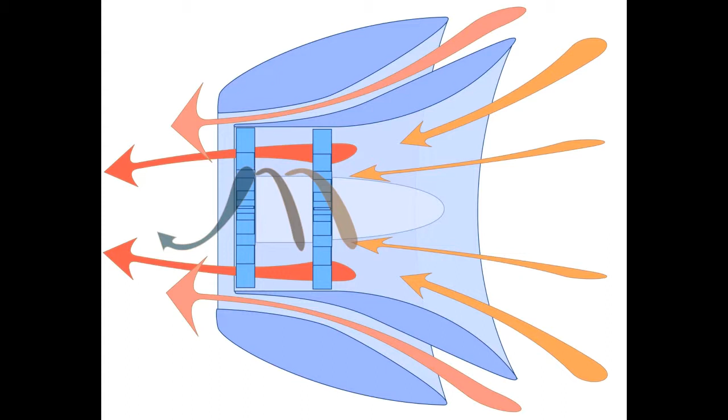Strait Power consists of two converging nozzles. Water enters the first nozzle by direction of the orange arrows. It's accelerated past two turbine blades. Upon exiting, the water receives an energy boost, causing the water to flow more rapidly through the center nozzle.

With an idea in mind, I approached DTE to find out how much energy was used and how much Strait Power had to produce. Contacting Great Lakes Observing Systems for information about current river speeds, I plotted a map of viable locations that Strait Power could function in.

On June 30th, 2010, University of Michigan's Hydrolab described an open water blade system in development. They agreed to combine our projects and test Strait Power.

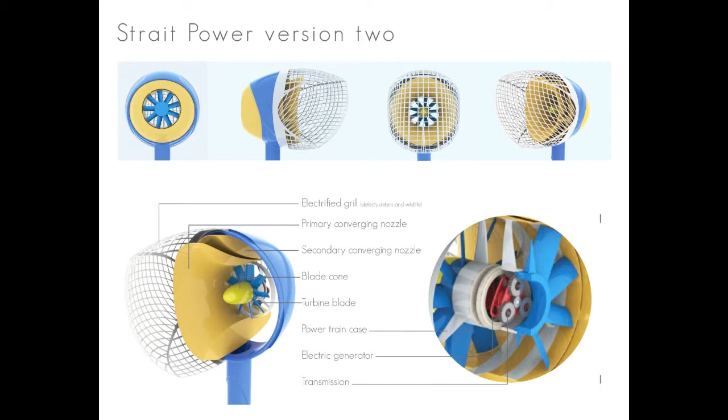Drawing inspiration from the shark, version 1 was a tribute to the gaping giant's mouth. With visualization of inspiration, I quickly moved on to version 2.

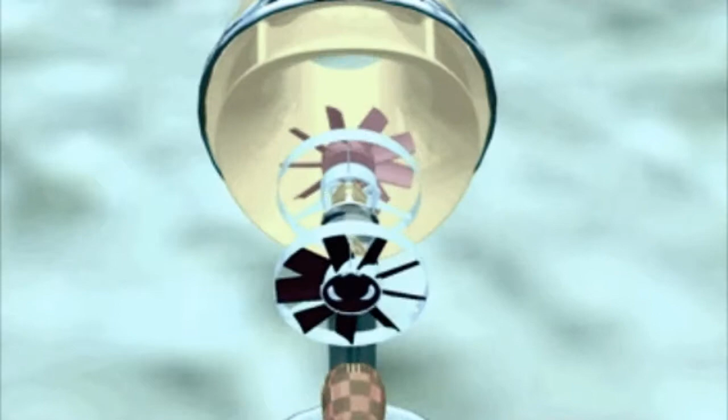With visions of water rushing through the turbine, I thought Strait Power should consist of an electrified grill for deflecting debris and diverting wildlife, a blade cone to help in accelerating the water past two turbine blades, with a planetary gear transmission and electric generator.

Water rushes into the turbine, rotating the first turbine, then reverses direction when it hits the second.

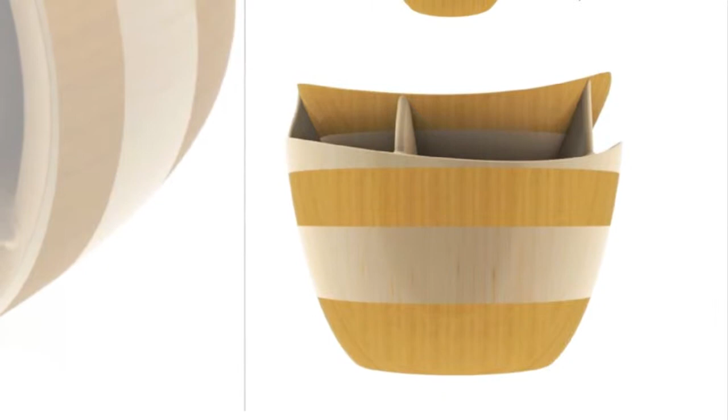With the concept conceived, I approached University of Michigan with my idea for testing. With my idea approved, it was time to build a prototype. The prototype started with $0 and nowhere to build it.

CCS was going through renovations. On August 1st, I had to find a workshop and funding. Testing was going to start at the end of October. I first found 3 trees to build Strait Power. Started working with a local lumber mill to turn the trees into lumber. But the mill informed me that the wood would not be ready until October.

Then I traded my lumber for the use of some tools, which led me to Dennis Burke, a man who gave me a place to build Strait Power. So I put 1,000 feet of lumber on my credit card and began to build.

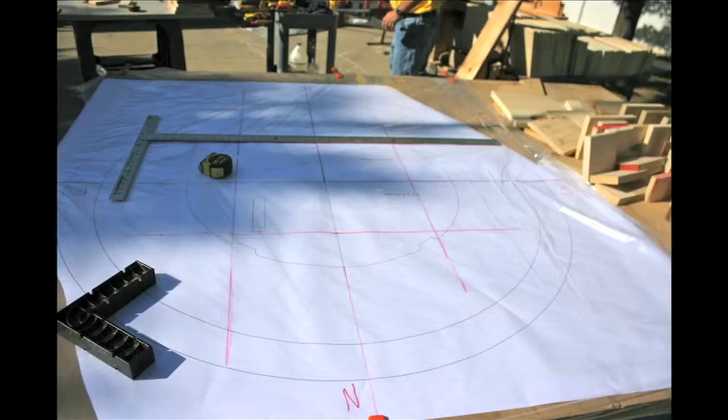It all started at Dennis Burke's woodshop, a place where 4,800 cuts would be made in 26 days. 8 rings were assembled, glued with every scrap of wood there was. Total, 390 hours before we made it to the CCS woodshop.

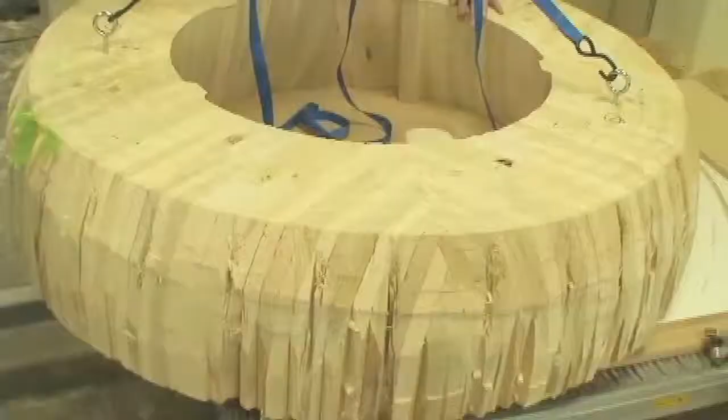Here is where we chainsawed, glued, doweled, and hammered the rings into workable, manageable shapes for the mill. Once the parts came off the mill, they were then sanded, finalized, shaped, trimmed, put into the perfect condition for assembly.

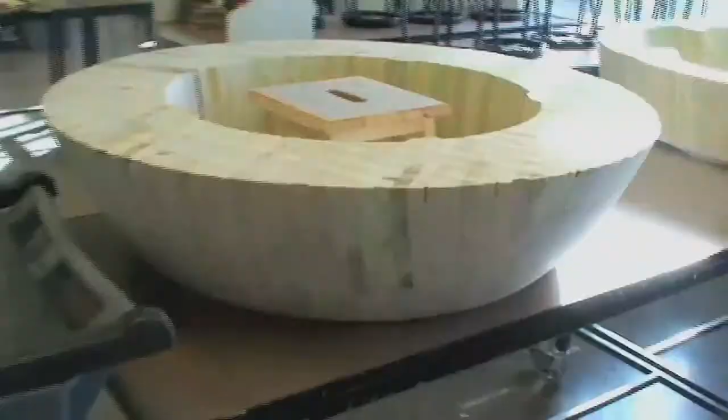All the joints had lined up, all the boards were in place, surfaces were flat. It was time to build the transmission.

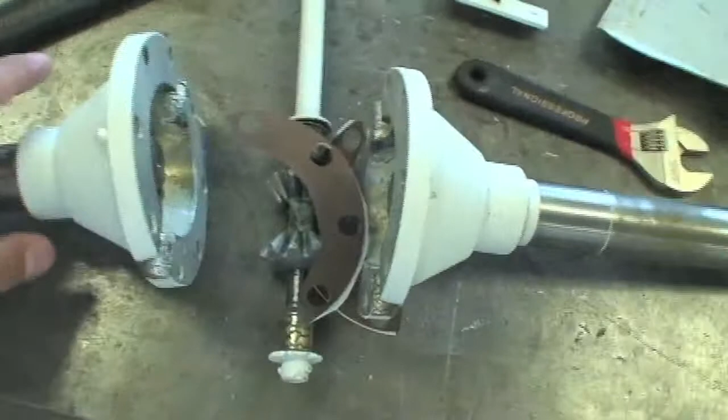Transmission consisted of a custom gasket, some pinion gears, housed in an aluminum housing from a go-kart differential. These parts had to be remachined, milled, and put on the lathe so that they would work in the fashion that I wanted. Assembling them together, the transmission came to fruition.

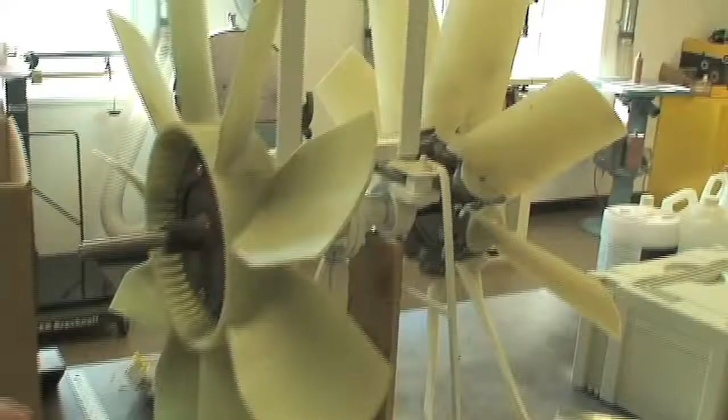Assembly continued on the nozzle. Simple tasks like sanding the inside required the use of a jib crane donated by the school to get in and out of the model. Sanding every surface, I added another 3 gallons of body filler to smooth out all the contours.

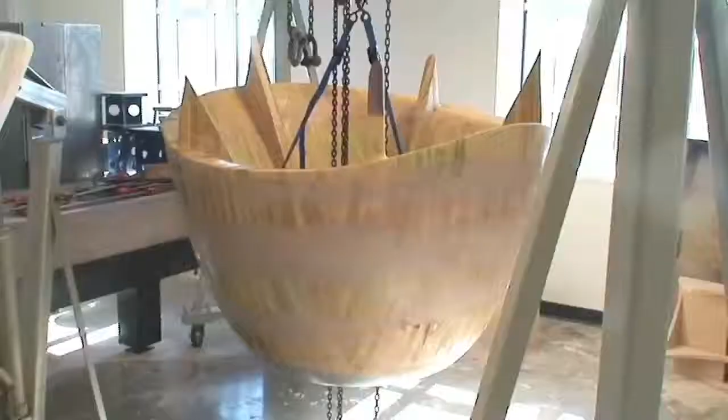The seams were lining up, all the math I'd done was correct. The 4,800 boards really came together into one fluid, dynamic shape. All that was left was to finish sealing it with marine paint

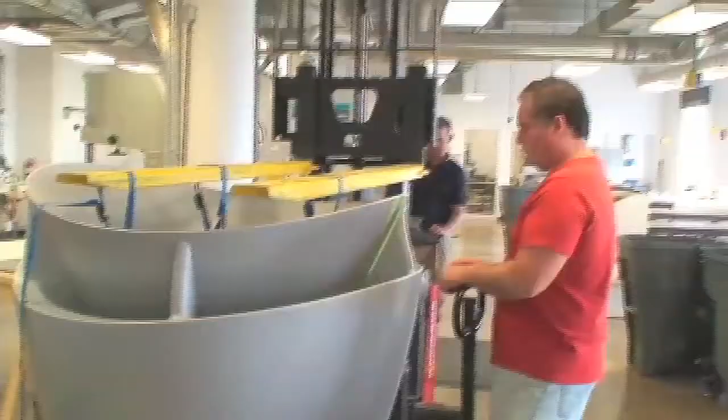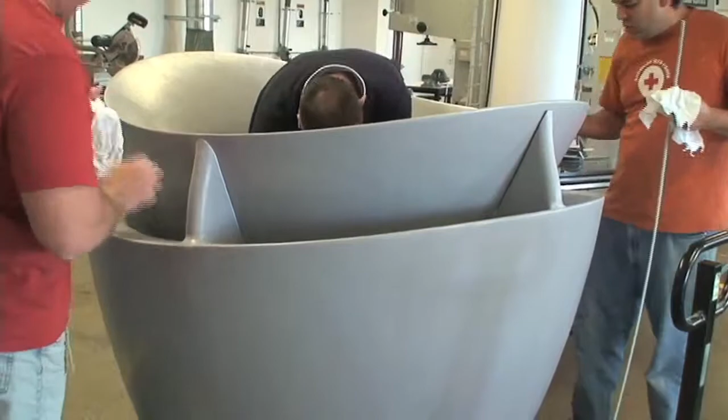and assembly with a forklift. Adding a little bit of sealer to seal up all the holes, placing it down ever so carefully, and screwing it together. Strait Power was packed and ready to head off to U of M.

32 days of prepping and cutting. Another 256 hours went into Strait Power. On October 23, 2010, a truck from U of M's Hydro Lab came to pick up Strait Power.

It was 711 hours of work. Strapping it down with tender loving care, hoping and praying that it would make the journey, I placed the transmission in the back of the truck, ready for its long trip, as I awaited its final assembly at U of M's laboratories.

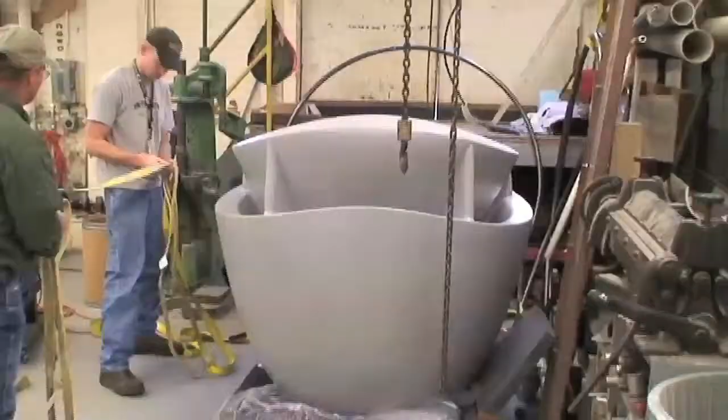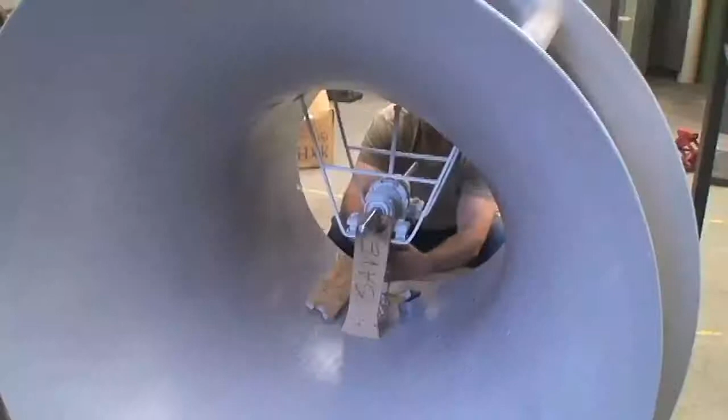When it arrived at U of M, we had the task of placing it inside its mount. We had to build a custom aligning bench, assemble the transmission, weld the final drive shaft, and imagine the water flowing through it.

Now time to tame the beast. University of Michigan's Hydrodynamic Lab, home of the largest educational tow tank in the U.S. This is a place where they test military subs, America's Cup boats, and Discovery Channel shows.

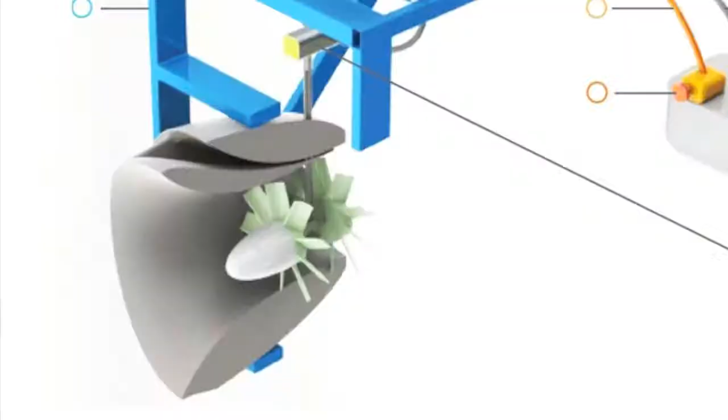With testing about to commence, a redesign was in order. We used a load cell to capture drag data, a hydraulic pump and pressure gauge to capture energy produced.

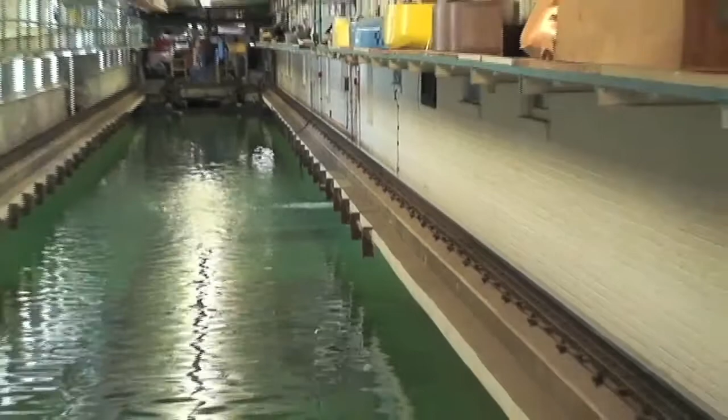What do you do with 1 million gallons of water? Well, you add 1.5 feet to it if you're going to test Strait Power. Testing Strait Power was more than just throwing it in the water.

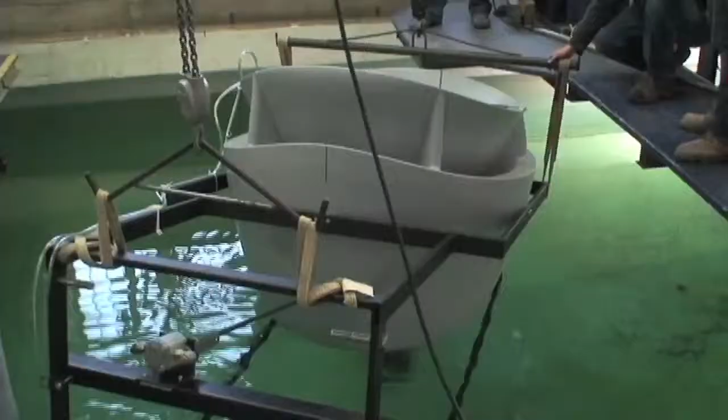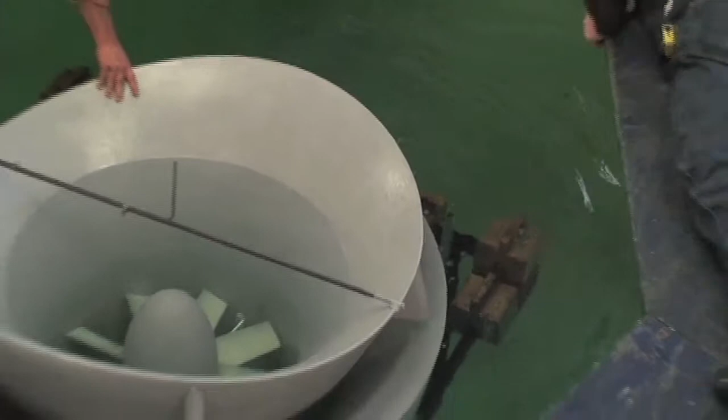This was a 900-pound model made of wood, steel, and aluminum that had to be placed in. The problem with wood is that it likes to float, so once we got Strait Power into the water, we had to add 600 pounds of lead weight to it to sink it just enough to fit under the carriage.

Then pulled into place by the straps, 900 pounds of force was taken to hold it down. Trying to burst from the water, our clamps and metal held it in place for its first inaugural run.

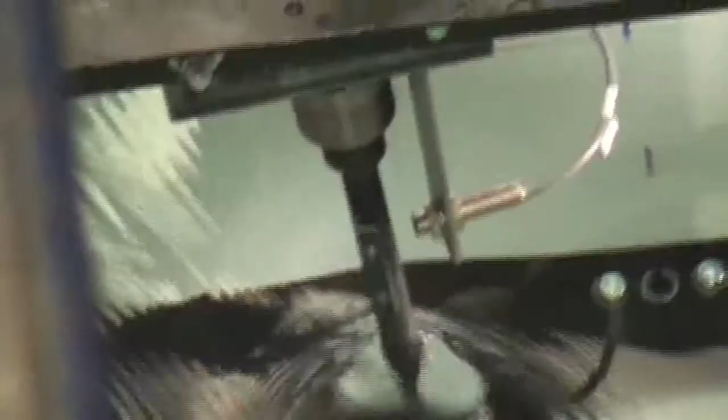And then it came. Strait Power started to make electricity, producing pressure. The oil from the pump started running freely.

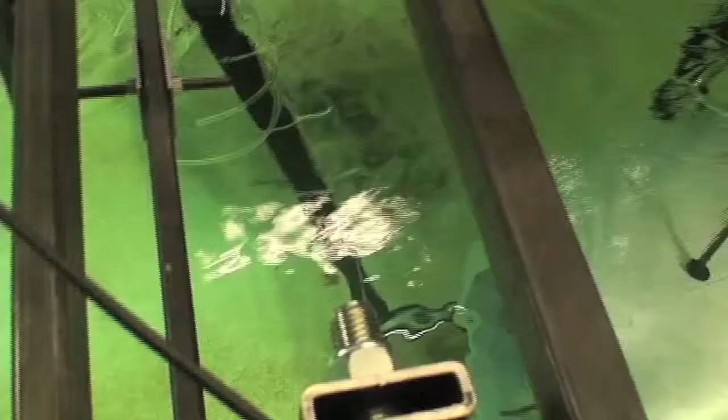As with any testing, we were stressing the limits of possibility. From all this testing, Strait Power started to crack and swell, wanting to burst from the water from its buoyancy force. It grew another 4 inches, but we continued to test as it was holding together.

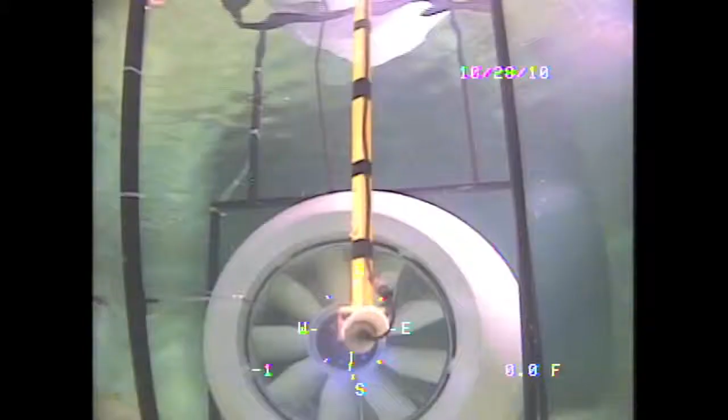And then, nothing. We had to send in the robot to find out what was wrong. Knowing something was broken, I jumped in, took it apart underwater, brought it out, and found that a weld had broken off on our pinion gear.

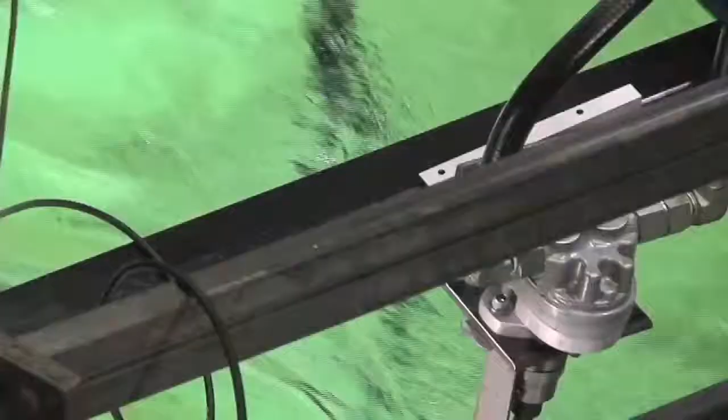With it reassembled, we were back to testing. We added a new hydraulic pump, and we could begin seeing the water flow, until part of the shaft broke again.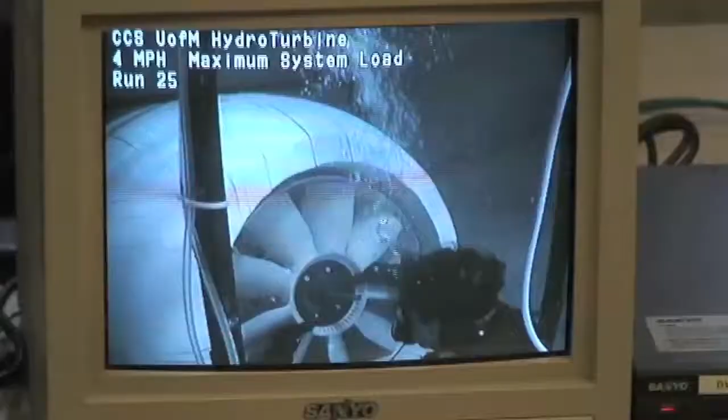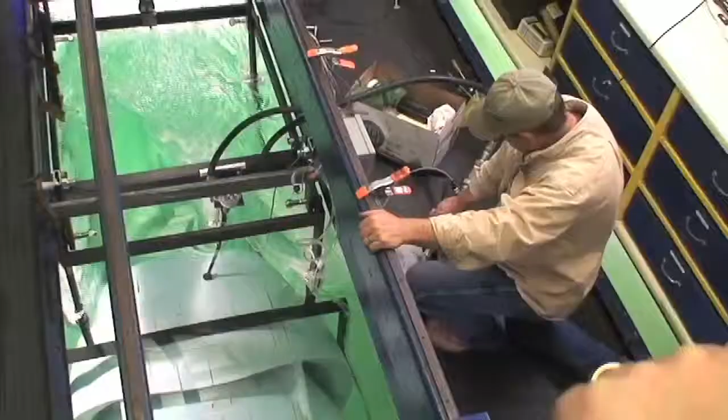This time, the blade had spun and stuck on permanently. Disassembling Strait Power, rebuilding the center shaft, we were back to testing. With another hydraulic pump in place, we were able to dial up the pressure and really create some power.

Strait Power is more than a possibility.

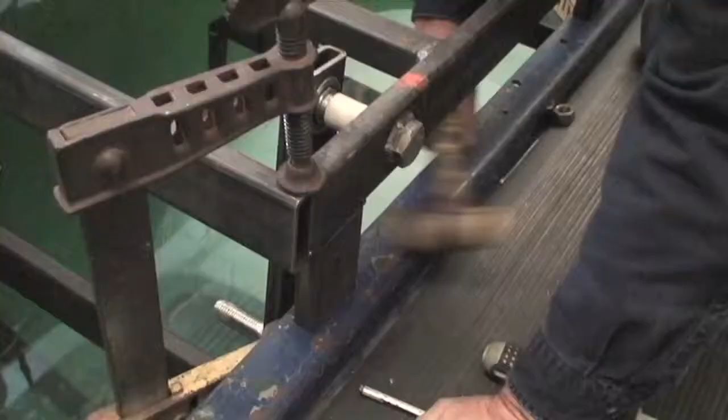It was time to go home. It was time to release Strait Power from its underwater prison, to bring it back to the surface, to see what it had done, to see what it had become.

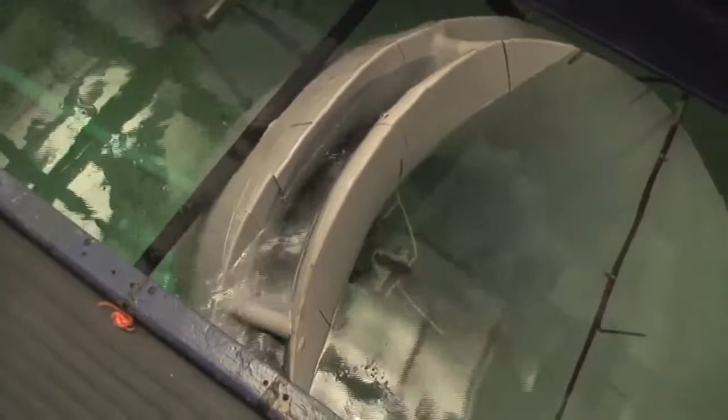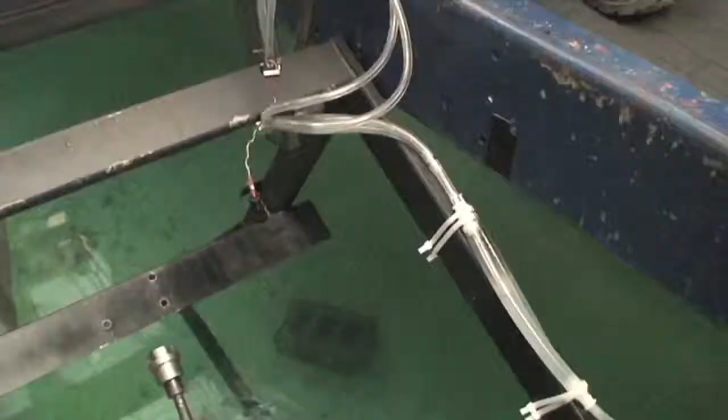A cracked, swollen beast of a project. With signs of aging, rust was forming, emerging everywhere. It was removed with the utmost care. It still had its own force to rise to the surface.

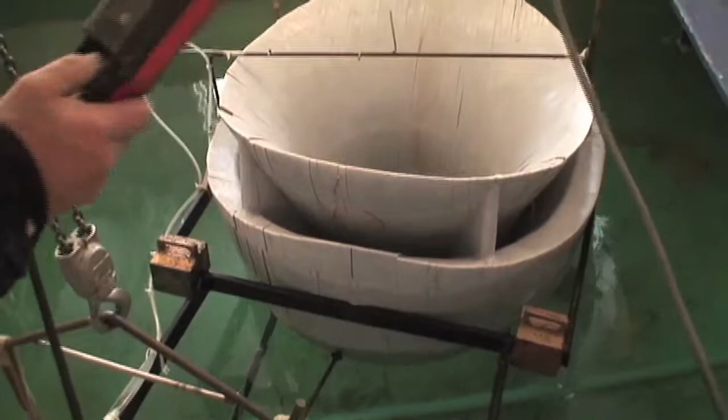Putting on an extra 300 pounds of water weight, Strait Power came out a swollen, cracked giant.

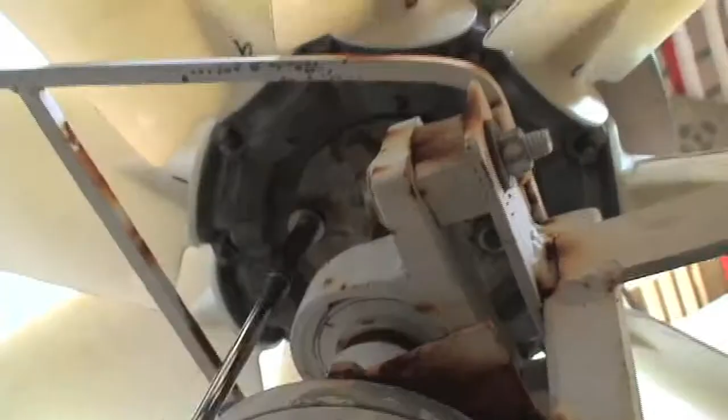It was time to do what we had to do to characterize the system, to see what kind of forces and energies were lost. So we reassembled the transmission, put the fan blades back on, and designed a fixture for testing.

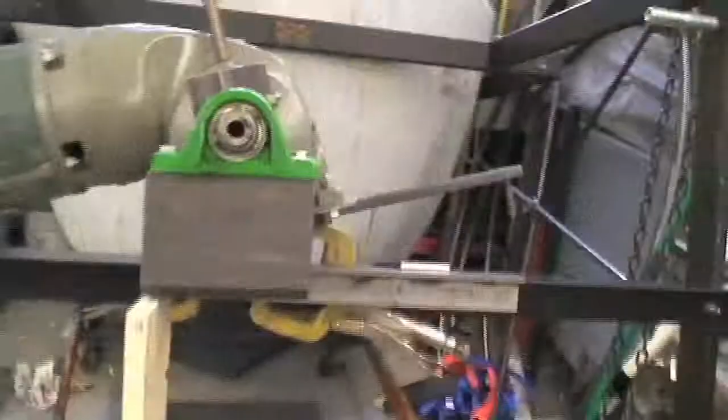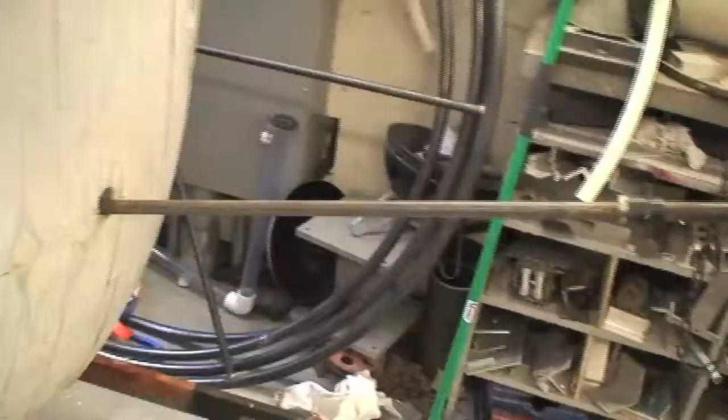The fixture consisted of a 1-to-7 gear reducer connected to 2 pillow block bearings that supported an electrical motor about the axis of rotation with a 1-foot arm, so we could measure foot-pounds of force produced. By knowing the RPM speed, we were able to calculate energy lost in the system.

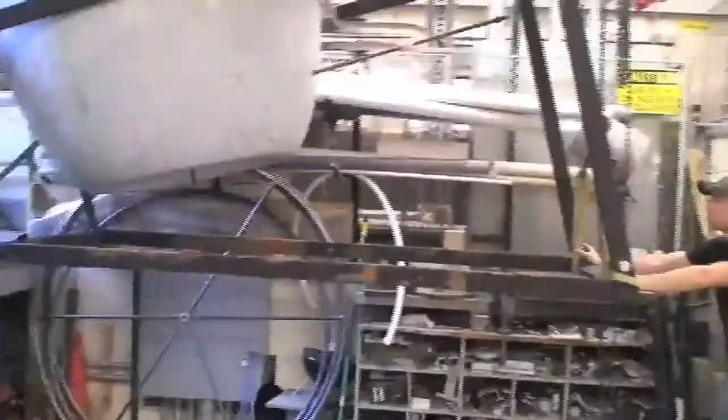It was time to remove Strait Power. It was time to take it home. It was the middle of November, and 200 more hours had been put into the project for testing, a total of 911 hours to make Strait Power.

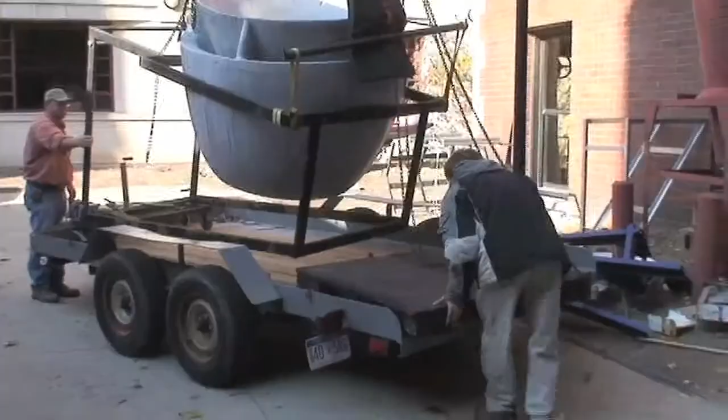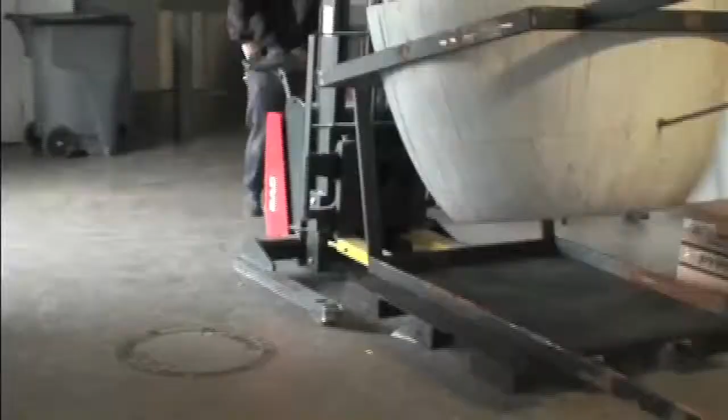Donations from the University of Michigan were $80,000 for testing and parts. Private donors, anonymous donors, and CCS donated $15,000 in milling machine time to produce Strait Power. $95,000 later, my dream, my vision, had come to fruition.

Strait Power version 1 improves power output of a single turbine blade by 40%. I next drew a visual interpretation of the water flowing around Strait Power, which led me to lengthen the 2 nozzles to decrease the pressure wave produced by Strait Power.

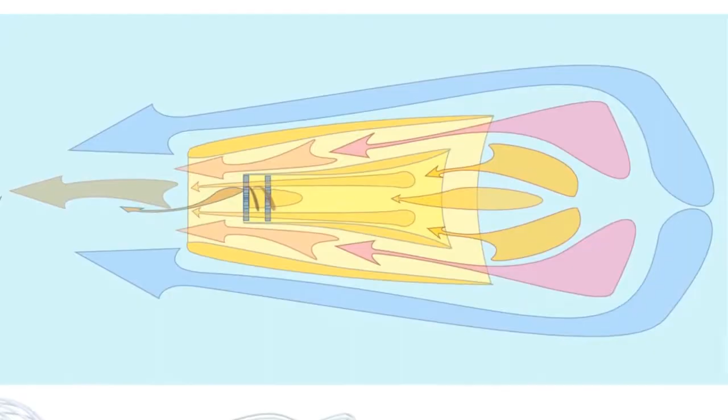With a good grasp on the idea, it was time to apply Strait Power's concept for the world. Concept 1 for outdoor enthusiasts and the military: this consists of a portable, collapsible version which expands when cast into a moving body of water. It can then be used to remotely power electrical devices, such as GPSs and electric fences.

The next application is for industrial use, producing a minimum of 40,000 watts. This megamouth design has a 10-foot diameter blade, allowing wildlife to pass freely through it.

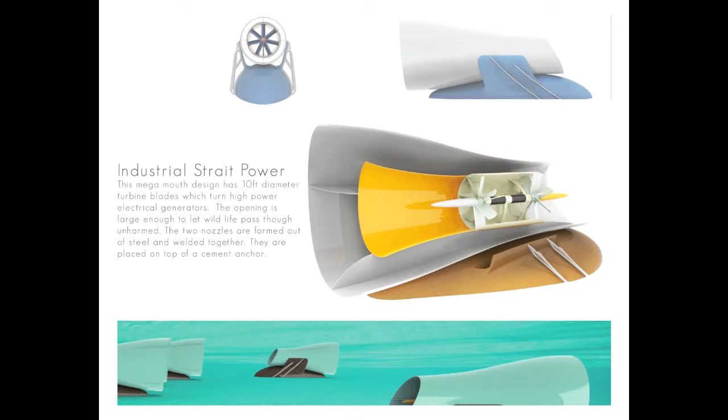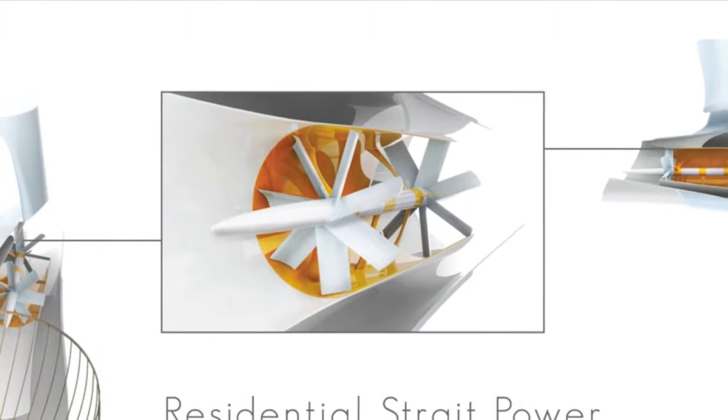The next version is for the residential market, able to be placed under docks or on riverbeds. It consists of a removable powertrain system that can run hydraulic or electric motors, allowing the user to run electric devices or hydraulic equipment, such as presses and log splitters.

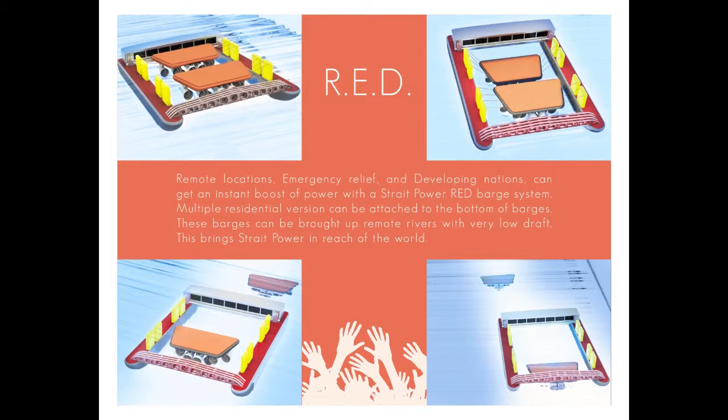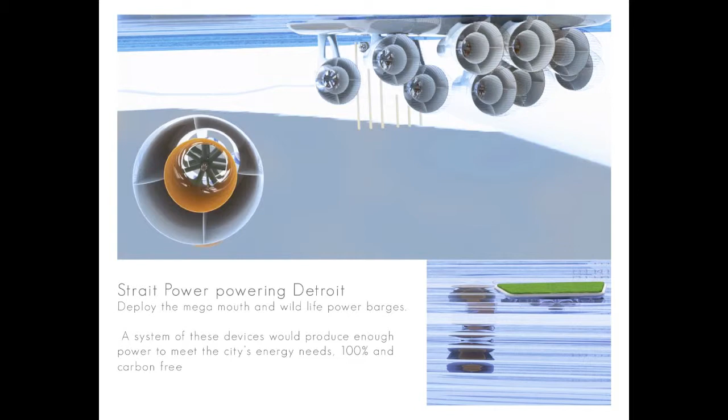Operation Red: Remote Location, Emergency Relief, and Developing Nation provides systems for deploying power stations along the river's edge. Now back to Detroit. Deploying a combination of barges and megamouth designs, Strait Power could produce the energy the city needs, 100% carbon-free. Barges are inexpensive to build, easy to service, and can be used as wildlife refuge for migratory birds.

Strait Power is a choice on living better. I'm Anthony Reale, and I'd like to thank you for listening.